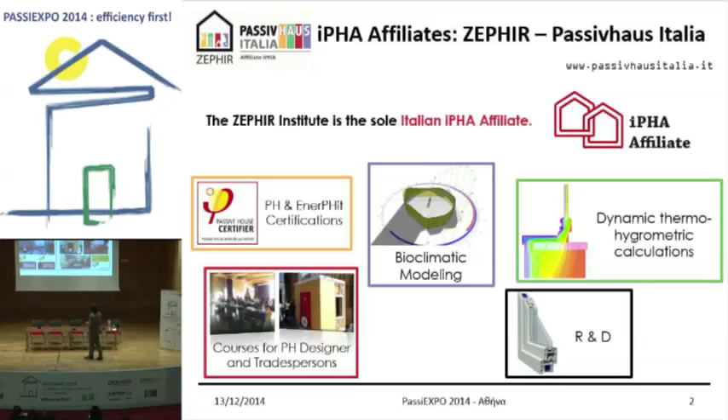And this guy, we told, okay, let's do something better. Let's do an economical analysis in order to see whether this hotel could be convenient or not. So we're not speaking about anything but about numbers, about costs. And of course, this should have been economically feasible for him. So among others, as said, we do courses and so on. Our third national conference will be in March.

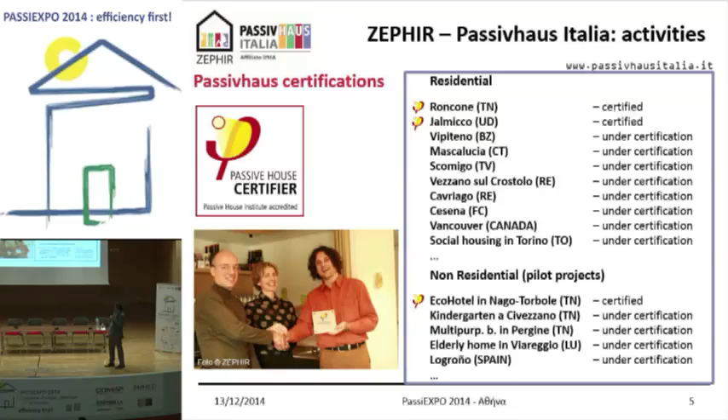And this was the list of the existing certified units in Italy. Among others, also some nice non-residential ones, including a kindergarten, an elderly home, a multipurpose building, and this hotel. And these are the owners of the hotel, who were given the Passive House plaque during the last International Passive House Days. I say something again, because I don't know if everybody was here this morning. So let's analyze this project.

So this is a wooden structure. First of all, I don't want to present this because it's a wooden structure. I'm a building physicist, and I know how important the thermal mass, the thermal capacity of a building, is. We can do whatever we like with passive house, because we can build in concrete, in bricks, in wood, in timber frame, or massive timber, and so on. This is massive timber. I really insist on this subject of the thermal mass, because if you are going to build here, you have to be conscious of all pros and cons of what you do.

Because, for example, if you use a light structure, then you have to have very good building services, because otherwise in summer you will suffer overheating. So it is. This is physics. I'm sorry, but so it is. But still, it can work, and it can reach the requirements for a passive house, even in summer. So there's no problem about this. I just wanted to tell this.

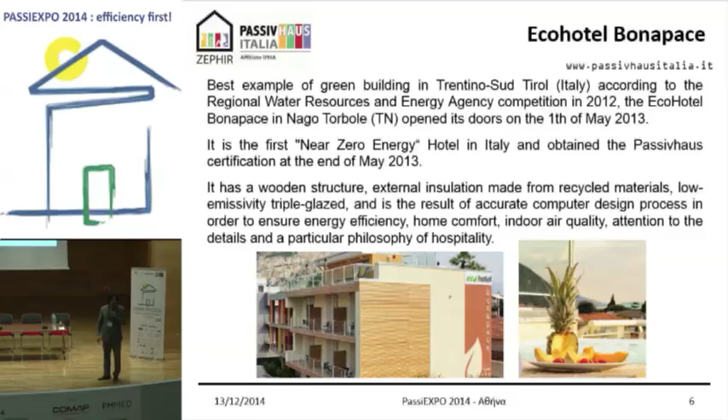This is a Passivhaus hotel, which means in principle one could think that people are forced to live like in a Passivhaus, which means you cannot open the windows, which is not true, but of course there are prejudices and so on. The temperature cannot be set as they want, but only 20 degrees, but maybe someone wants it a bit colder, someone a bit warmer, no problem. So everyone can choose whatever he likes. There are only some automatic controls in order to prevent discomfort, such as the automatic lowering of the blinds when the client goes out and so on.

So where is it? Beautiful place. This is Nago-Torbole by the Garda Lake. This is also called La Busa in Italian, which means the hollow, the hole somehow, which means, as you see, it's surrounded by mountains, but here there's a sort of heat island. So here you have a milder climate.

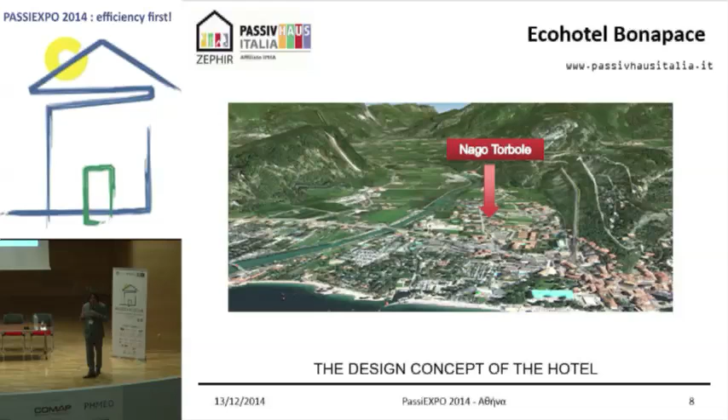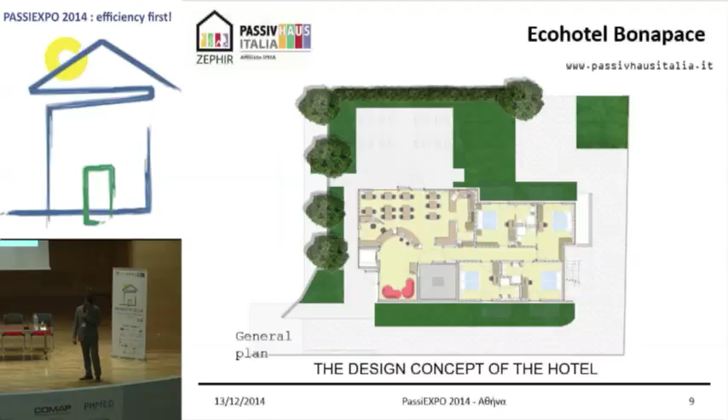And the hotel, this is the design concept. Here is the reception, here is for breakfast. There are 20 rooms, almost 500 square meters on 3 floors. And here at this floor, these are rooms for people with motion disabilities, so at the ground floor. And the higher floors you see afterwards. This is the basement.

This is, for example, for the bikes, because Garda Lake is very well known for climbing and biking and hiking and whatever is with -ing, which is very nice, but which means that during the winter there's nothing. So it's really like this. Everyone is closing their structures.

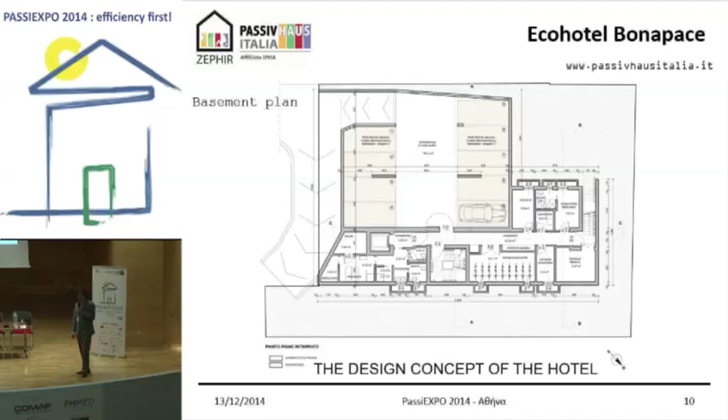This guy who built the hotel received this year so many requests from abroad, from German-speaking people mainly, or from people coming from northern countries and so on, that he was forced to open it, even though there's nothing to do, because it's raining, it's foggy, there's partly snow somewhere, but still people wanted to go there and experience it. A lot of other hoteliers went through to experience how the Passivhaus is. So he received a lot of requests.

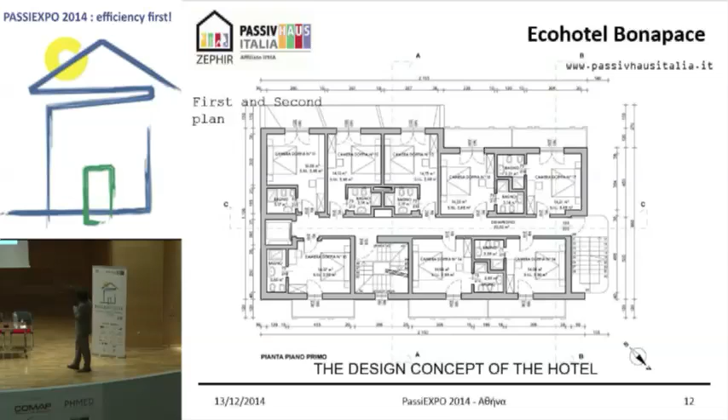So let's go to the first floor. These are the rooms. As you see, there's a central corridor, which serves also for distribution of the ventilation system, as you will see. And before going further, I want to show you a little picture of these, coming back. These are the mountains which surround the buildings.

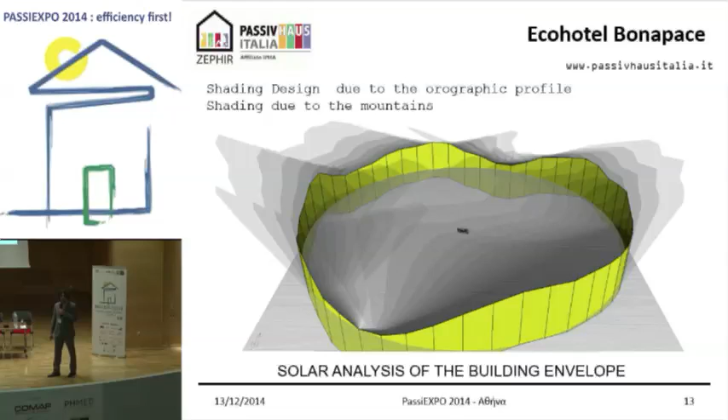Of course, in front of it, there's the sea, but this is a lot steeper landscape. Therefore, we modeled it very clearly in order to see how the situation is in December or in June or in August. And what about the surrounding buildings? And what about this overhang? Do they work or don't they work? Do we really need a vertical blind system, shading system or not?

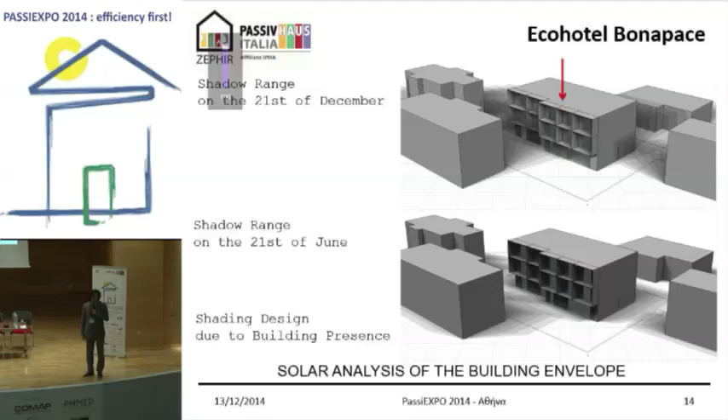You could argue it doesn't matter, we put it there. It's a reason of cost. So if we don't need it, you don't put it there. Of course, modeling, designing before, it's very important. For example, this building hasn't yet been built, but we know there are not windows on this face, but still it could influence something also on the lateral part. So we also designed it as if there would have been a building from that side.

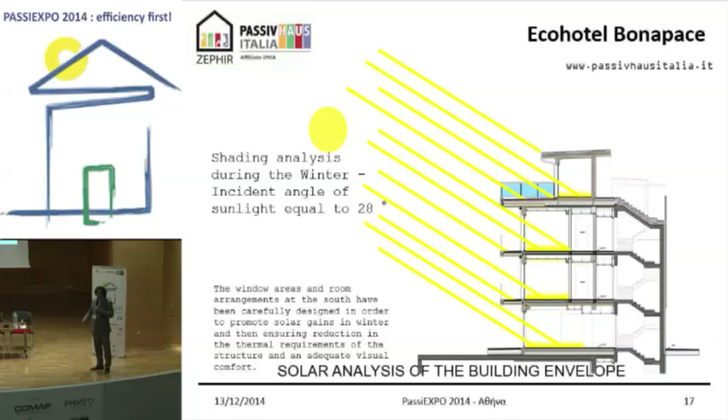It heats the ceilings; they have not that much thermal mass, but still they can get some solar gains and then release it during the whole day. We have to prevent also sound transfer to the other rooms, because as it is realized in timber structure, you can figure out which material is mostly used for instruments: wood. Therefore, this is to prevent sound from one room going to the other. Therefore, there's a lot of ceiling parts or extra walls with mineral wool, which prevent the sound going further.

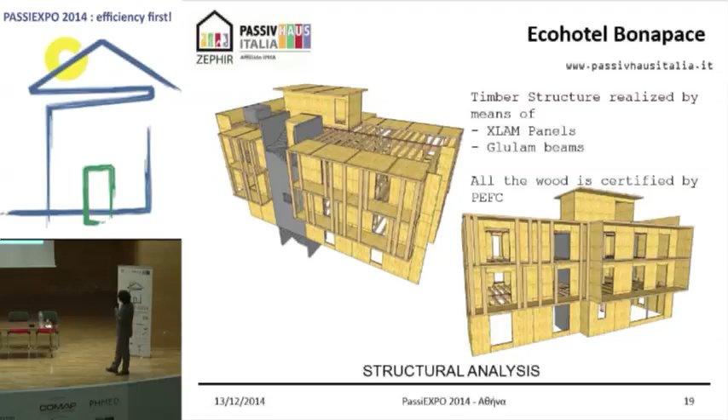And this is made by so-called X-lam, so cross-laminated timber structure, which is sort of massive timber panels, and glulam beams for the rafters and purlins and so on. The building assemblies, for example concerning the roof, we have a lot of different structures, of course, and I don't want to go through this. You will find it then on the internet, I guess, right? So they will be distributed afterwards, so you can take a look at it.

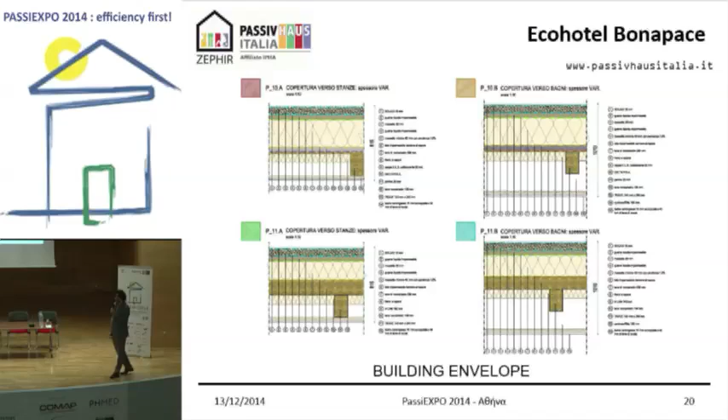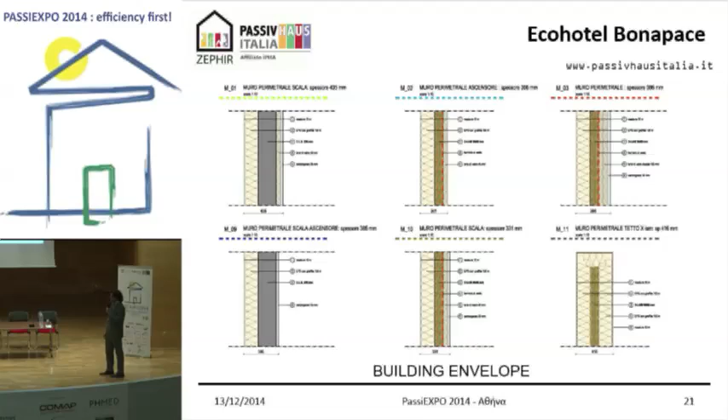This is, for example, how we realized the overhang, so the balconies, which were decoupled from the substructure through, you don't see it here, but it's here. So it's a steel angular profile, which has been completely covered by thermal insulation. And this is not that tragic in the end on the annual heating demand.

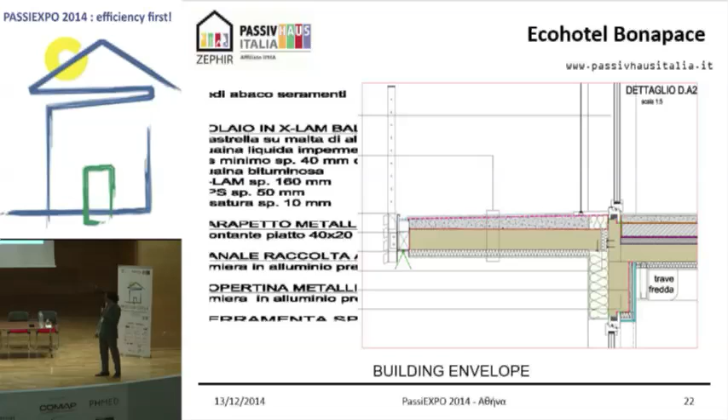You see also here, for example, a hint. This is trave fredda. Here you have a room. I will come back to this. In English, you should translate it like active beam. This is the way how to heat and cool down the rooms. I will come back later to this point.

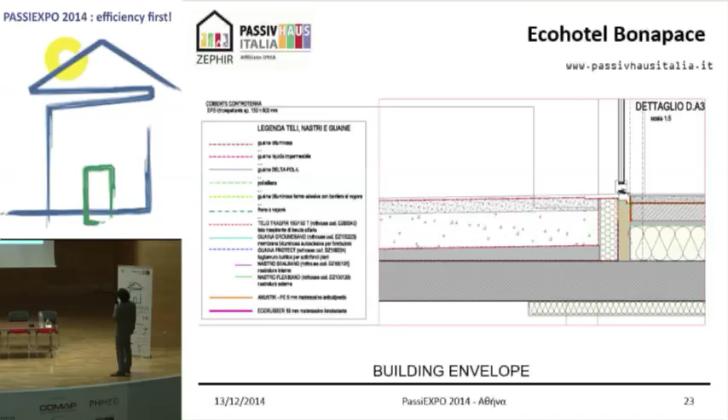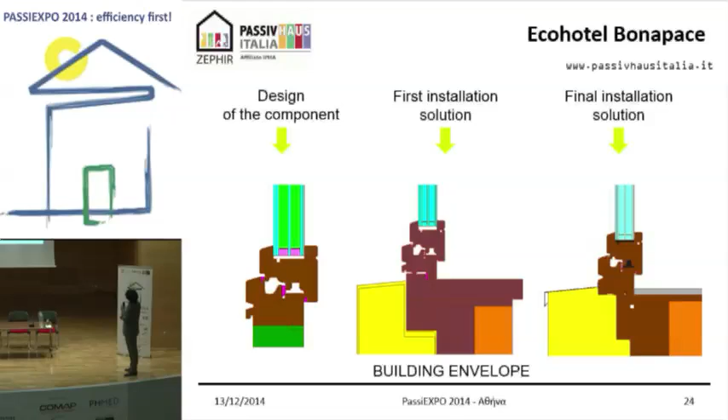This is how we adapted a common, let's say, window for the installation in a passive house. We wanted to have it as cheap as possible, but still suitable for a passive house, which required a lot of calculations. It's not yet optimized in this solution. There are other solutions which I don't show here, where we achieve even lower psi values of the installation. And in the end, we tried to work on the profile, on the holes, and so on. And as you see, it's become better.

And these are, for example, the values. So it's not that fantastic, but still, if it's okay, it's okay. So if there's no condensation, no mold growth, and we are under 15 kilowatt hours per square meter per year, and this window costs €300 per square meter, so why not?

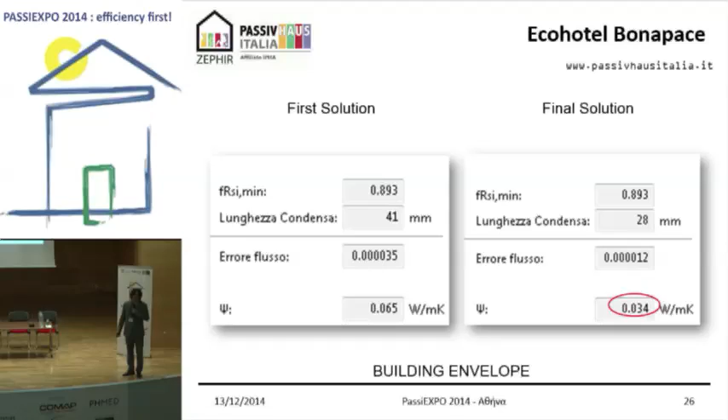This is the scheme of the ventilation system with heat recovery, 90%, which stays on top of the roof and which distributes along the corridors, as said. And here, these are the active beams I was referring to before. So the idea is simple. We want to give the end user a regulation of whatever temperature, of course, within a certain range. How do we achieve this in a low-cost way?

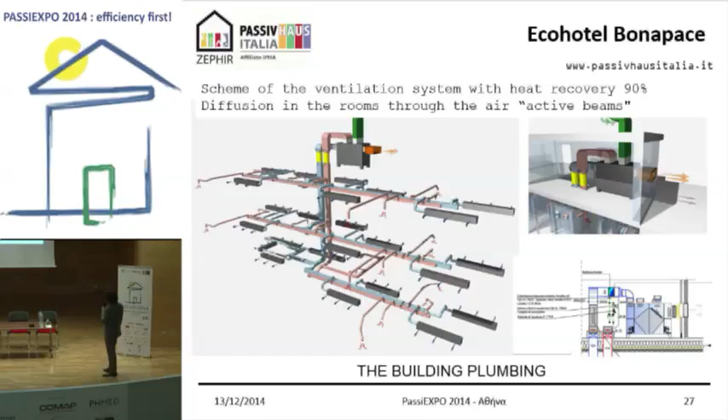So the idea was it goes directly in the room after the passive heat recovery, after the ventilation system, and then there's something active in each room. This something active are sort of chillers, if you wish, where the air flows through, and in these active beams, cold water for the summer and hot water flows directly there and heats the incoming air. In order that it works very well, through the Coanda effect, it can reach long jets and still provide thermal comfort to the occupants. This is how it works, basically.

So this is provided by a heat pump, which is here, and through a puffer, so a buffer, and storage for the warm domestic hot water. Everything goes from the puffer, so the storage for the system water, if you wish. It goes basically to these collectors, and then it's distributed to each active beam. Is it clear how it works?

Which is a very tricky way of doing it, but without post-heating the incoming air directly after the heat recovery system. It is done room by room. If the user is okay with the temperature, it's okay. Otherwise, they can act on it and set a different set point.

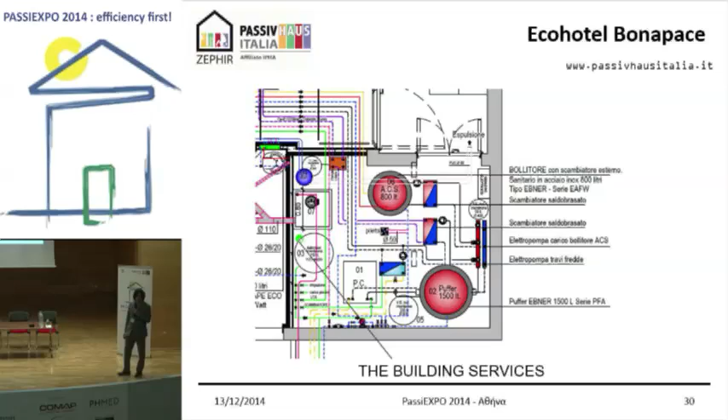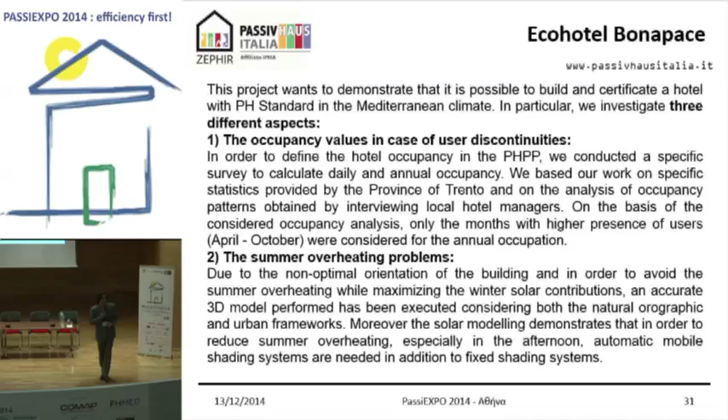So we had different issues to tackle. So occupancy values in case of user discontinuities. For example, how can we account for the internal heat gains? This is very difficult, especially if you make a new building, especially in non-residential buildings. In this case, we took all the average occupancy values of the area on Lake Garda, and we tried to split it monthly. And the nice thing is that in this way, even though some higher or lower values of internal heat gains could be there, still the passive house works. And this is the major result of this.

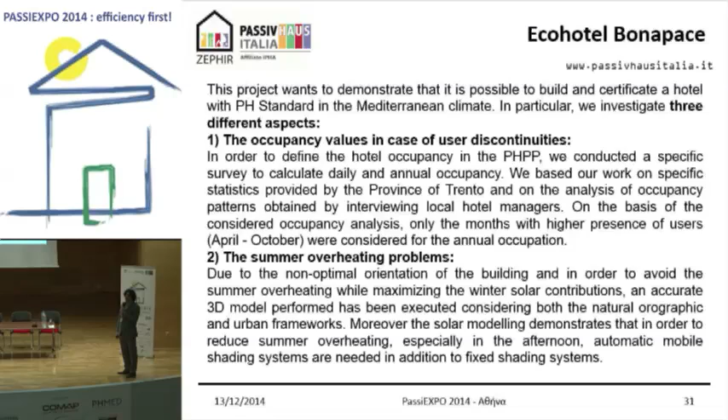The overheating problems were also due to a poor orientation, and this was solved through the installation of external vertical blinds. So automatic mobile shading systems are needed in addition to fixed overhang systems. And then evaluation of costs and benefits. So as a building physicist, I have to go to the numbers.

This guy told us that in the other hotels, he pays €1,500 a month for heating. In this hotel, he pays €1,500 a year for everything. So this means economically feasible. This means that he gets higher occupancy of the hotel, as I mentioned before, because people like to go there.

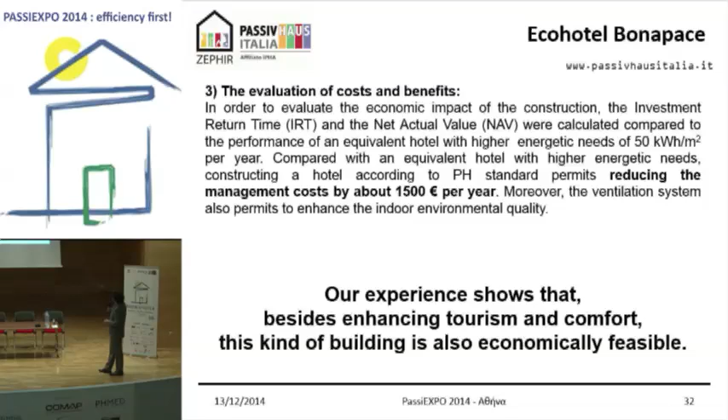This means a great opportunity for us to disseminate the concept of a passive house, because people can convince themselves by going there that there's no prejudice, no a priori thing that could prevent thermal comfort in a passive house. They are free to do whatever they like. If they want to regulate the temperature, they can do it. If they want to open the windows, they can. Of course, when they go out, windows close, obviously. So our experience shows that besides enhancing tourism and comfort, this kind of building is also economically feasible.

This hotel was completed in March 2013 and was certified as a pilot project, by me and the Passive House Institute as a certifier. And this is what they said: Our greatest satisfaction in having built a Passive House hotel comes from our customers' smiles, happy to have had the chance to stay in a building that cares for those who inhabit it. Now that is pure energy. Besides this, they offer eco things, eco food, and all these kinds of experiences, which are also liked by the customers. So these are the last pictures.

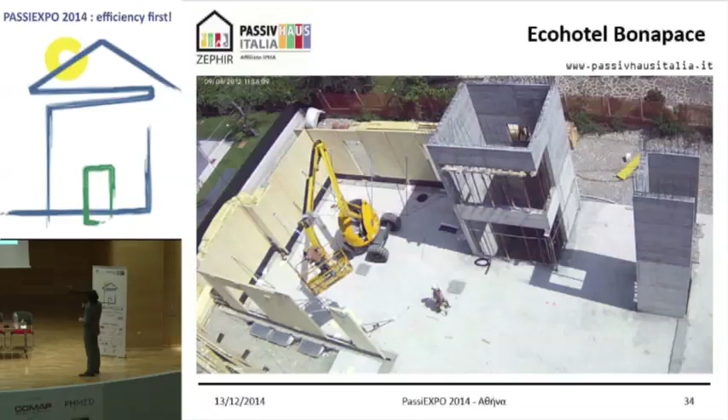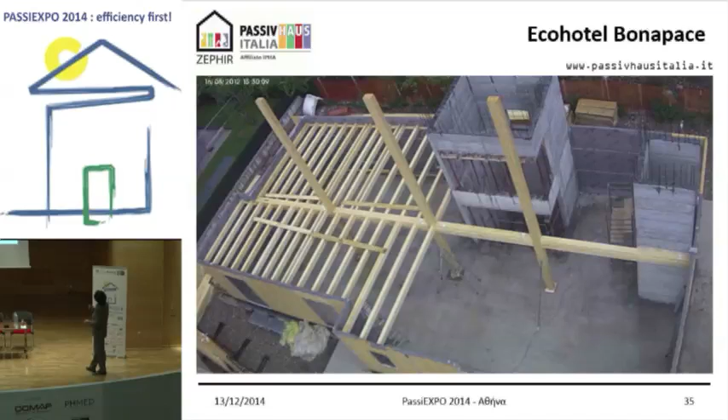If you see here, it is the 9th of August 2012. It begins with the construction of the external walls. This is the stairs, and this is for the lift, for the elevator. Then come the rafters and purlins. It goes further. Then it's closed with the wooden boards and so on.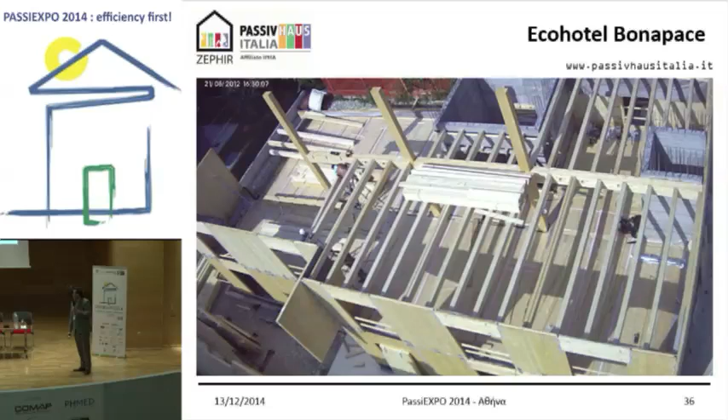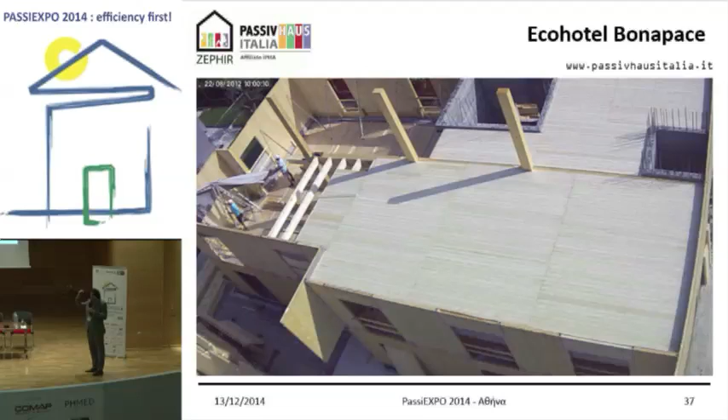And here, as you see, the airtightness is done like this. So from the inner side, you see this. This is basically the vapor retarder, let's say, which has been left a little higher, which will be sealed with the incoming new external wall in order to realize a continuous airtight layer. So this is how it's been done. And it goes further and further, as you see here, right?

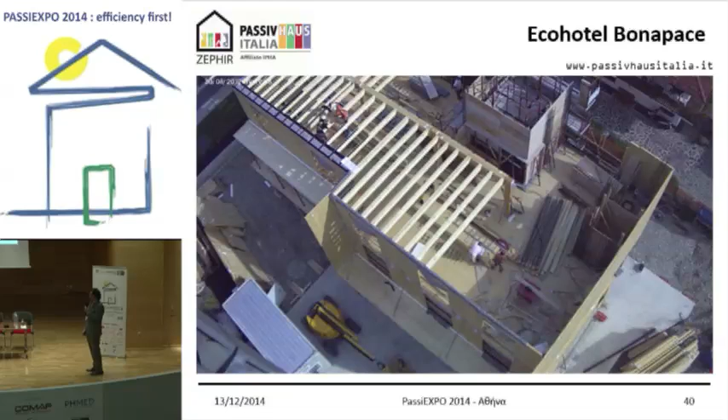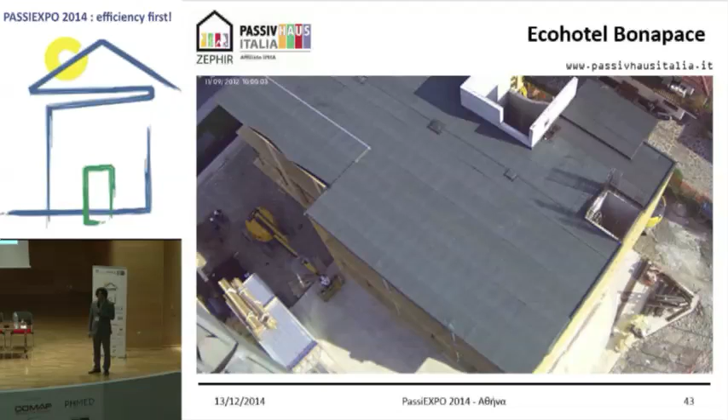And it goes further, and then on the top, they have to go with some extension for hosting the ventilation system, which has to be very large, something like 1,300 cubic meters per hour. And in the end, this is finished. And this is 11th September. One month, it's over. This is how it works with wood.

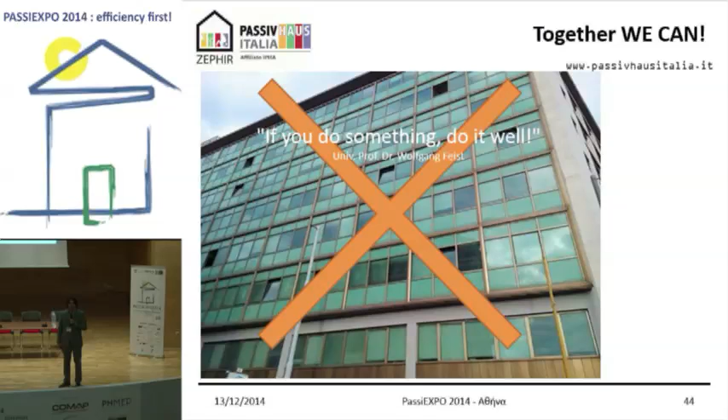So again, if you do something, do it well and do it for your country, for the health and the future of your children. Thank you very much.